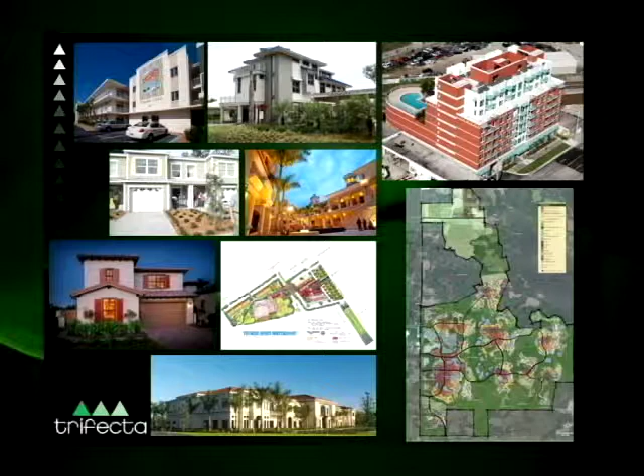These are just some examples of different projects. On the second row, left-hand side, those are Habitat homes in Dunedin, all the way up to a zero energy home you see in the top middle, out on Treasure Island. So there's everything from Habitat townhomes all the way up to, in the bottom right, a community called Babcock Ranch, which currently has approval for about a 75 megawatt PV array and is going in for approval of a 150 megawatt array, looking to create a sustainable town powered entirely by solar. It's currently a cattle ranch, providing meat and produce locally from the farm, with a completely different mindset as they develop this town. So you can see, high-rise buildings, low-rise buildings, mixed use, all of these can be green.

The way I set this up is, two years ago we really focused on what you can do as a homeowner. We will get there, but I wanted to give a larger perspective first and then narrow things down. Also, I didn't want to do the same thing I did two years ago—that's just my thing, I don't ever really do the same thing twice. I'm happy to give that information, and I know it's available on YouTube, so I really didn't want you to have a rerun, so to speak.

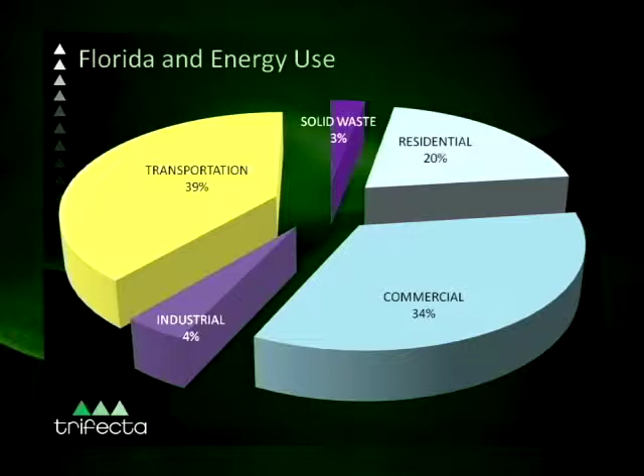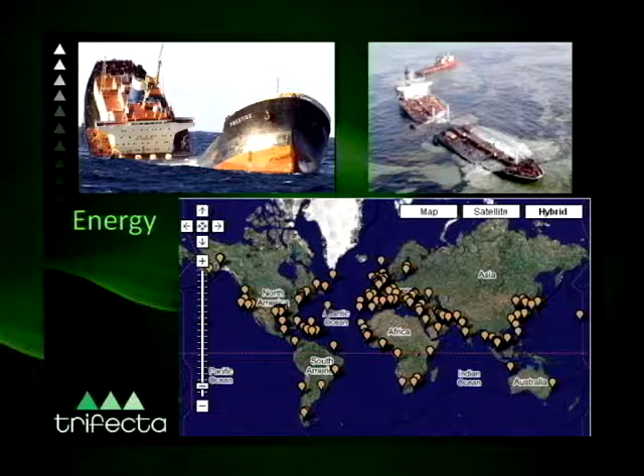Traditional fossil fuels have their issues. We get it from around the globe and it comes to us, and it doesn't always make it here. We've experienced this close to home and in the very recent past.

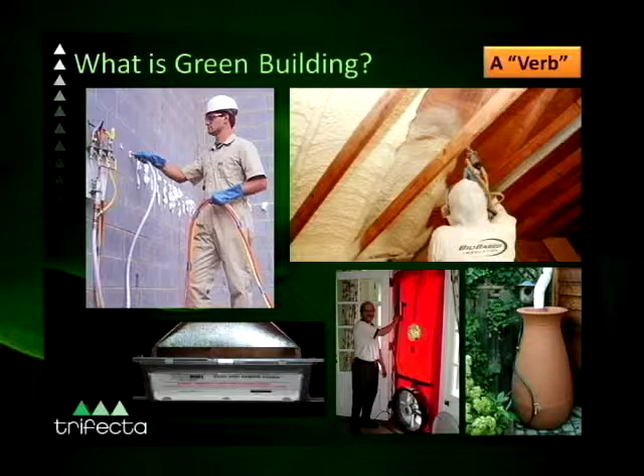We talk about green buildings from a perspective of both a noun and a verb. A green building is this house, this structure that is more environmentally friendly—that's the noun. But it's also a verb, from the standpoint of what did we do to make that house high performance, healthy, energy efficient, water efficient. What are the actions that we took? Whether we're going to add additional insulation, do some performance testing, protect the ducts, or harvest rainwater—those are all the actions we do to make the homes or buildings more healthy and efficient.

When I look at houses, we talk about this whole house approach, and I like to think of houses like a body. If you think about your body, you have your bones, your structure—that is the structure of your house, the walls, the things holding it all up and together. In your body, you have organs, and those organs basically move everything around. Just like in your house, you have mechanical systems—your air conditioning, your hot water heater. Those things are your organs for your house.

And then you have what I call the trim or the finish—the makeup, the hair, the clothes, it's on the outside. We all see it, that's what we call eye candy, so to speak. And we have that in a house as well—it's what we see, the walls, the floor. Ooh, I really love that glass tile. Ooh, it's recycled glass tile, that makes it even better. But it's $20 a square foot. Ooh, I don't like it that much.

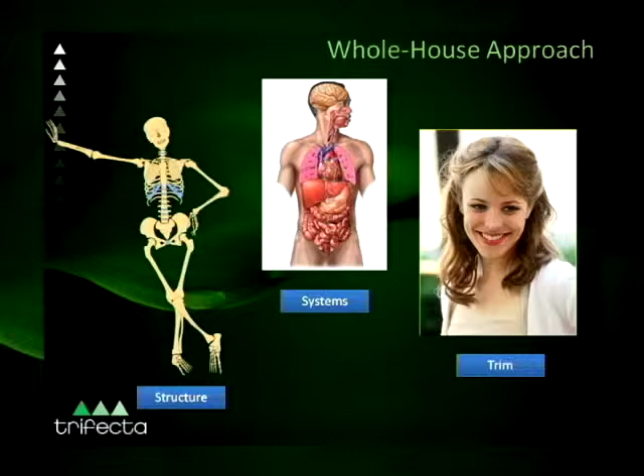Those three things have to all be functioning in your body. If you have a broken bone, you're not right. If you have a failed liver or a kidney that's not working, you're not right. And if your skin is falling off your body, someone will probably point out to you that you're not right. So those three things have to work together and be functioning properly for you to be a healthy person. The same thing goes for your house—if one of those systems is out of place or out of whack, your house is out of whack and it's not going to be healthy and efficient.

One of our biggest challenges with existing homes is the fact that we will go in and fiddle or tweak with one of these components without thinking about what it possibly could do to the rest of the system. And so that has historically been a challenge.

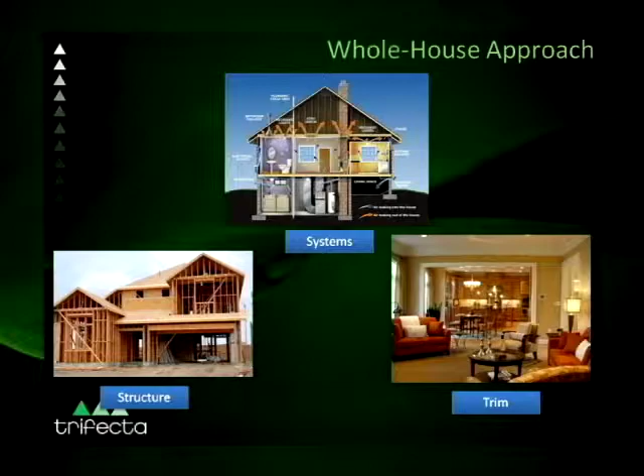When we hear about sick building syndrome, we have an older house that someone has decided we need to make leak free. They go and seal it up so tight without now introducing fresh air. Well, the fresh air used to come in through cracks and crevices—not necessarily a controlled way to do it, but a way to do it. Now that we've sealed that up, we're not getting enough air exchange in the house. So we have to take that into consideration if we're out there caulking and weather stripping—are we making this house too tight? Because it was originally getting air exchange through leaks. Not that leaks are good, but we have to definitely at least solve that problem so the system stays in balance.

And of course, this is the kind of stuff that I see when I go into attics. I will tell you quite honestly, this is my brother's attic. He said, Jen, I need you to look at my attic. And he is not a handy guy—I don't know that I would ask him to hang a picture in my house.

I'm like, Chris, if you want your insulation to work properly, it needs to be evenly distributed throughout your attic. There are some issues with this. So I'm trying to figure out, well, how—attic insulation doesn't just eject itself from its original home.

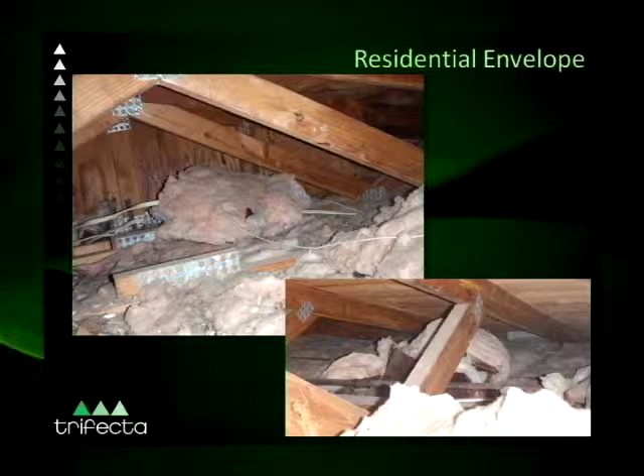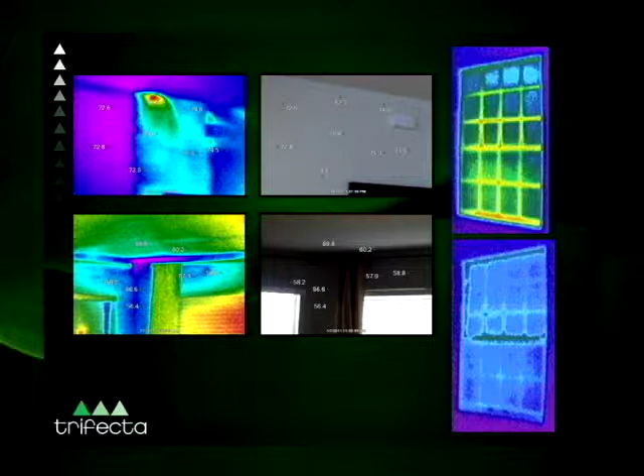You can see here leaks in the walls, leaks in the windows, or energy transfer, heat transfer. That's an issue with, quote unquote, the bones of the house. You can see here again infiltration coming in through the outlets, so an issue with the bones of the house, so to speak.

Here you can see leaks in air conditioning ducts. This I would consider an issue with the organs, or that part of the mechanical systems of the house.

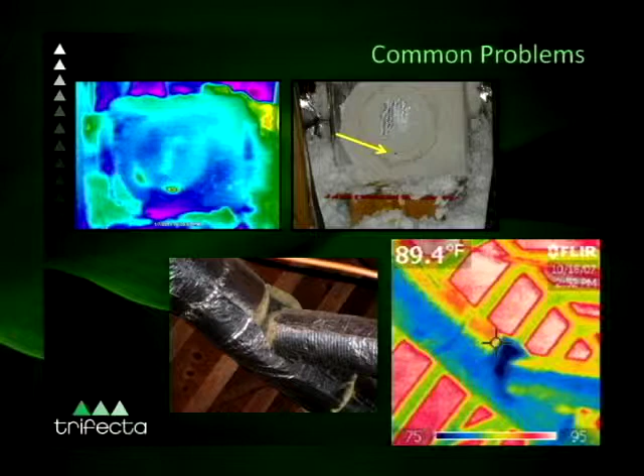And then this is what I would call the trim, so to speak, the pretty looking stuff. So this is why do people remodel? Well, they may remodel because there's a structural issue. They may remodel because there's a mechanical issue, or they may remodel just because they got tired of the tropical fish theme, or the very dated bathroom, or the issue with the mechanical system. So this would be what I would call the skin, or the trim, or the eye candy, or a lack of eye candy, so to speak.

And so this is why we kind of move into this. Why do we improve or try to improve upon our homes? I'll just very quickly go through these things. These are really the emerging trends in green and sustainability, and what's going on, and why today we're really going to focus in on energy and water.

So we look at energy, water, building labels. These are certifications and/or labeling associated with green buildings, corporate greening, eco districts, greenhouse gas, net zero, project funding, and durability and products. I just want you to be aware of where this industry is going from a standpoint of energy diversity and monitoring.

The fact that I mentioned fossil fuel, a lot of it's coming from the Middle East. From a national security standpoint, we're looking at making sure we have a diverse portfolio in energy. Whether that's plasma, solar, tidal, wind, algae, or biomass, any diversity in energy is a positive thing from a national security standpoint.

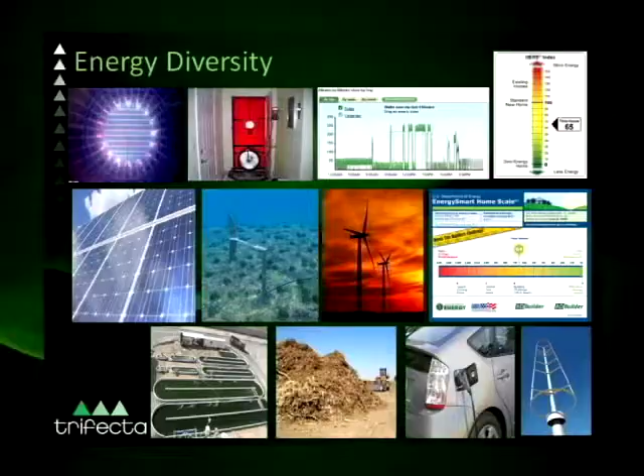Quick note about smart grid. Smart grid is this concept of decentralized energy production. Right now we have power plants, they produce power, they send power to all of us. Very convenient, very inexpensive. Compared to what most people around the globe pay for power, we have very inexpensive electricity. So smart grid is the idea that we can generate power locally, whether that's through solar on our homes, or through other means.

From a standpoint of someone might be producing power that they've generated out on an axle while driving, and then that gets fed back through a battery into their own home, which is called vehicle to grid. We've talked about electric vehicles and charging an electric vehicle, and then having that vehicle feed power back to the house during peak hours.

So that's something I'm working with quite a bit with Southern Company, which is a large power company in the country. From a standpoint of decentralized solutions, the reason I like this as well: number one, this is how we always used to do it. If I lived somewhere and I wanted water, I had a cistern or a well. If I lived somewhere and I wanted sewer, you had an outhouse or a septic tank. Not to say those are the most environmentally friendly, but the fact that I didn't have what we'll call transmission losses. We'll talk quite a bit about leaks today and how much we're wasting with leaks.

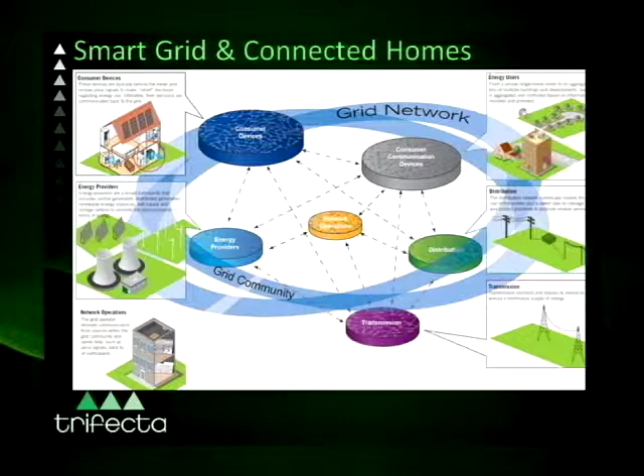The Model S Tesla, the sedan we get to play with, I can get about 300 miles of range out of it. So everyone who had that range anxiety of only going 20 or 40 miles and running out of power, that's not an issue with the newer vehicles. You can get larger batteries for extended life. The Chevy Volt, same thing—you can go 40 miles on electric, but it has a gas backup, so that doesn't become an issue.

What we found was by using an electric vehicle, I've saved $5,000 a year in gas. Now, I put a lot of miles on my car, so keep that in mind—I'm not your 10 or 12,000 mile a year person, I'm a 20,000 mile a year person. So my gas bill is significant.

$5,000 a year savings—now does that pay for a $200,000 vehicle? No, but those prices are coming down, so just keep that in mind. We figured out it cost about $1 to $1.50 a night to charge that vehicle, so $30 to $45 a month in fuel cost, versus my car which is $75 to fill, and I'm filling it sometimes 2, 3, 4 times a week depending on what I'm doing that week. So again, a significant savings.

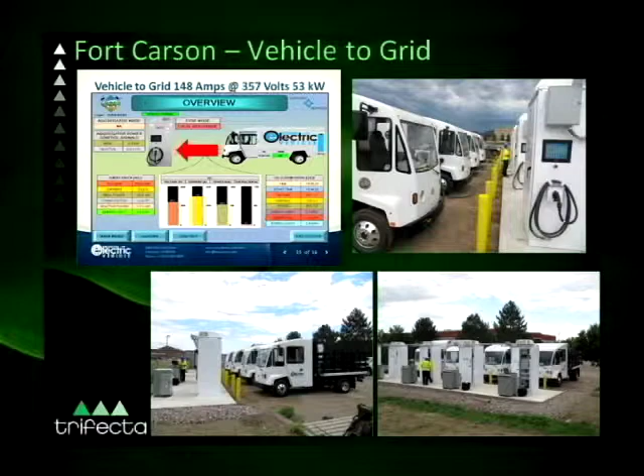This is Fort Carson in Colorado. This is actually the first live vehicle to grid system, and these vehicles are actually feeding back to the grid. You can see the amps and volts that they're creating. Those vehicles were out, they were charged, they did their thing, and now they've come back and they're feeding the extra power back into the grid. This is where we're going in the future—decentralized solutions, so to speak.

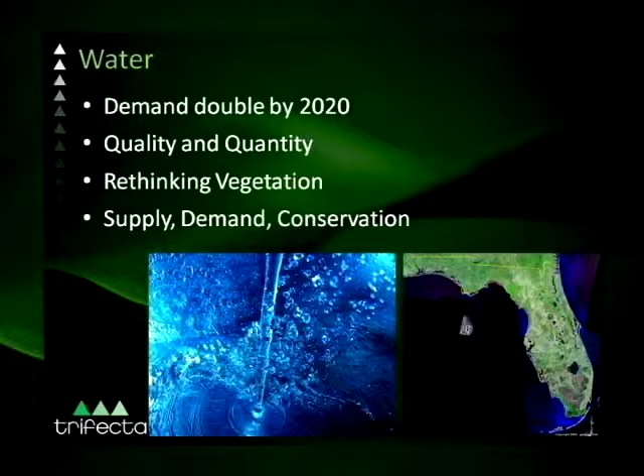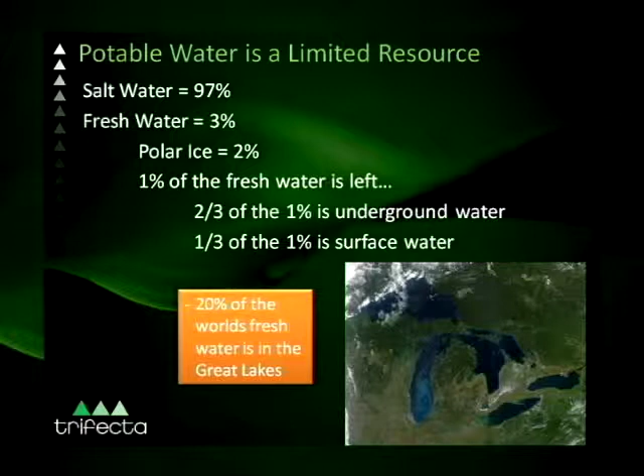Water—what are our issues with water? As I mentioned early on, I believe it's more critical than energy. You can live without power, you can't live without water. And you would assume, because we have a lot on the planet, that we have an infinite supply. Well, yes, we do, but it's costly to get. We know very little is actually easily available for us—1% or so is fresh, and the Great Lakes is where most of it is stocked in our world.

Looking at Florida, we get a lot of rainfall. Quite honestly, we get as much as we need from the sky every year, we just don't catch it. Nor would we want to catch it all, because it does need to go water our vegetation, recharge our aquifer, and feed our streams, but we do get quite a bit from the sky.

I mentioned hotels and how much water they use—we're looking at over 63 million gallons of water per day in that one industry in Florida hotels. That's based off of Tallahassee's count of hotel rooms available in the state and the quantity the hotels are reporting back that they're using daily. So keep in mind, when we're doing all these wonderful things to try and save water, we need to get out there and get the businesses saving this water as well.

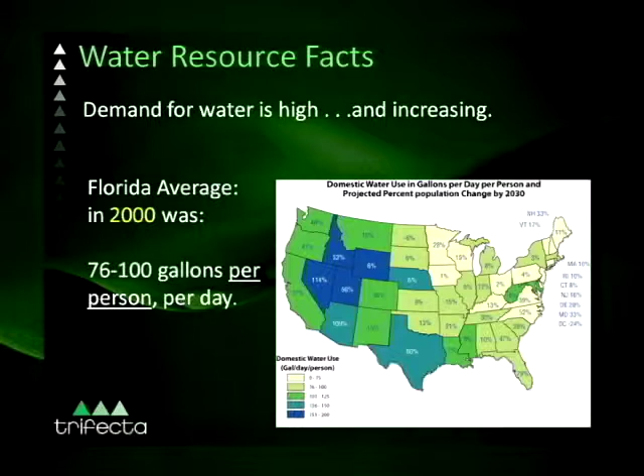So again, water resources, we know the numbers kind of vary between how many gallons per person per day, with 76 to 100 being some numbers. That number has gone up to 175. It just depends on whether or not you're including irrigation in that number. So a lot of times you see these numbers vary by almost 100 gallons per person per day, and that has to do with whether or not irrigation is included. But the bottom line is we're projecting a 79% increase in demand for water in Florida.

US average was 100, Florida average is 125, the high being 174. This does include irrigation. Water needed for just basic cooking, drinking, bathing, and sanitation, if you go bare bones minimum, is about 13 gallons per day—enough to drink, quite honestly. If you're camping, you know that.

Looking at eco-districts, what we're looking at here is creating either geographic or invisible boundaries where certain funding is available. So you may have been hearing rumors about PACE programs and funding where you can finance some upgrades on your house over on your tax bill. Those would be things that we would need these eco-districts for.

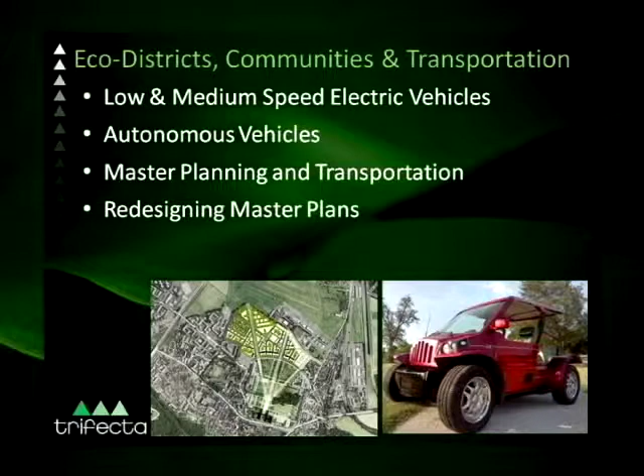And then looking again at low and medium speed vehicles, autonomous vehicles—how are we planning communities in the future? This is again renditions from Babcock Ranch, where you can see their build out is planning around these vehicles. You can see the town center before, but they are planning over the 30-year life of the community to build out the town center with autonomous vehicles. So they're working to say, okay, we can have these electric autonomous vehicles that move people around communities. As sci-fi as that may seem, this is where developers are thinking and planning future towns, so to speak.

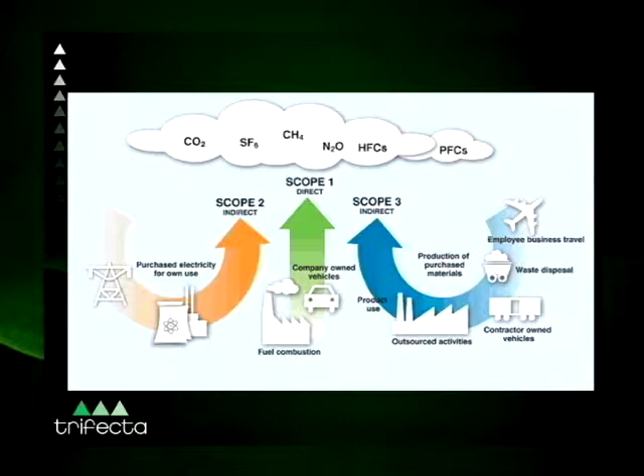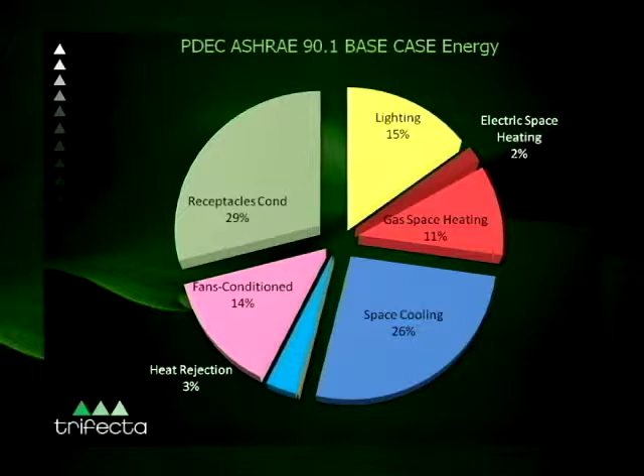We went through and threw everything, including the kitchen sink, at this building to make it as efficient as possible. Cost was not an issue in this analysis. We said, let's go up to R50 walls, let's go up to R100 insulation in the ceiling, let's go up to the most efficient equipment on the planet that I could buy. I don't care if it's $3 million for this air conditioner. It wasn't realistic financially, but we asked what could we do to try and make this building as efficient as possible.

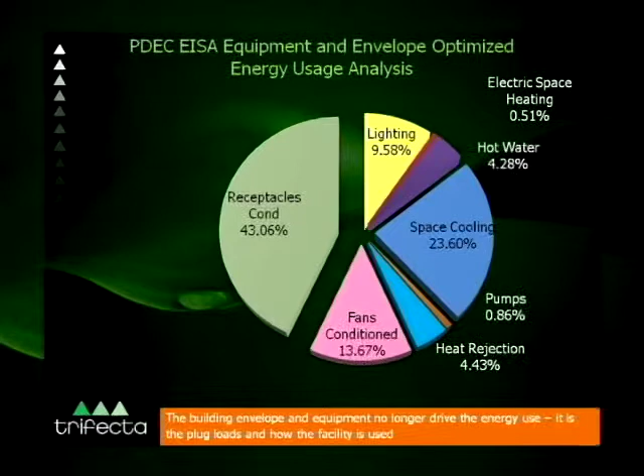And as you can imagine, you hit a wall. You have diminishing return—you can only make a building so efficient. Once we threw everything at this building, we found the best we could do was about a 43% energy reduction. And what happened was that piece of the pie, the green piece we call plug loads, began to dominate the performance of the building. So what that meant to us was, unless I take the people out of the building, I can't make the building more efficient.

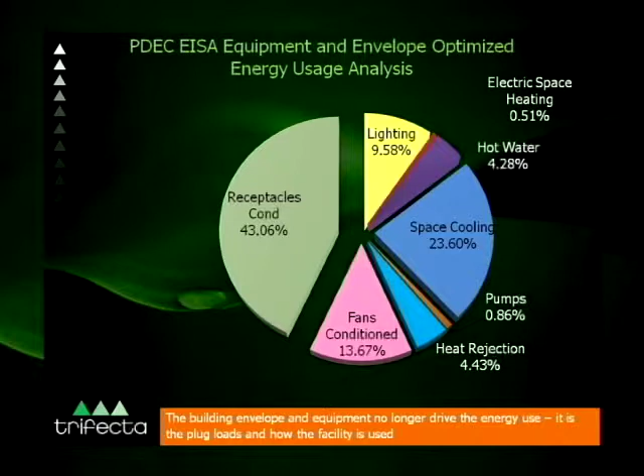This is as efficient as it gets because those people need computers to do their job. We would need televisions, microwaves, ovens, and water heaters for hot water. So unless I take the people out, I can only get so efficient with this building.

So when we talk about zero energy buildings, we talk about getting as efficient as we possibly can, but in order to make this go to zero, you have to have renewable energy. You have to have some sort of power generation that happens. So you can get as efficient as you want, but you're never going to get to zero.

The same goes for water. You will always have some water consumption. Now, where does that water come from is a different story. Does it need to come from municipal water supply, or does it all have to be potable? No, it doesn't. Right now, is that what most of us do? Yes. So just keep in mind that human element. Once we optimize efficiencies, we take over because we want iPads and iPhones and television and cable and hot showers and beautiful landscape, and we want that stuff.

So looking at federal funding, it's out there and out there quite a bit for green projects. That's good news that our tax dollars are going to support that. But we also want to focus in on durability and passive survivability, and improving durability of our structures against natural disasters is an important trend.

And then realistic green products. There was this trend for a long time about using bamboo and cork and glass tile, which was $20 a square foot, that no one could realistically afford. That has now kind of turned more into this pragmatic approach and sense, not just sexy. So, no, we're not going to do solar panels that end up covered in snow if there's not a correct way to get the snow off of those panels. So again, looking at a more practical approach to using some of these more environmentally friendly products.

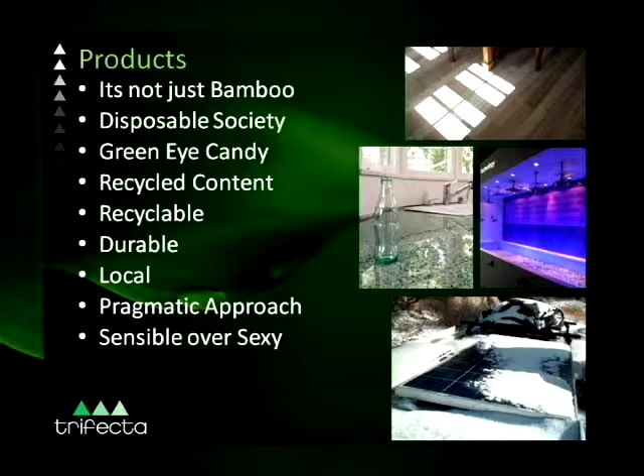And so popping now into this is my homeowner world, what can I do? And that is, know what a HERS score is. A HERS score is basically the mile per gallon of your house. We know we have a sticker, a mile per gallon. If I tell you I just bought a brand new car and I love it and it gets 8 miles per gallon, can you say that that's a good car or a bad car? Probably a bad car from a perspective of fuel efficiency.

We all know mile per gallon. We are comfortable with that terminology. A HERS index is your home energy rating, and in this scale, the lower the better. The lower you score, the better or more efficient your house is. Code right now, Florida Energy Code right now, is an 80 on this scale. So in order to build a house, you have to be an 80 or below.

But if you look at where code was in Florida over the past years, you can see in 2004, during the boom, the average efficiency of a house was landing around 111. Code right now is an 80. So almost a 30% energy difference between a boom-built house and what you have to do right now to pass code. Before 1979, there was no energy code in Florida, so that was the first time we actually had an energy code in Florida.

The house that I purchased and rehabbed was a 1972 house, and on this scale, it was a 275. It's now sitting at a 62, and I completed that renovation almost 10 years ago now. So just know that that scale can keep going up, and that's go back in time, go up on the scale. And so when we talk zero energy, we talk zero on this scale.

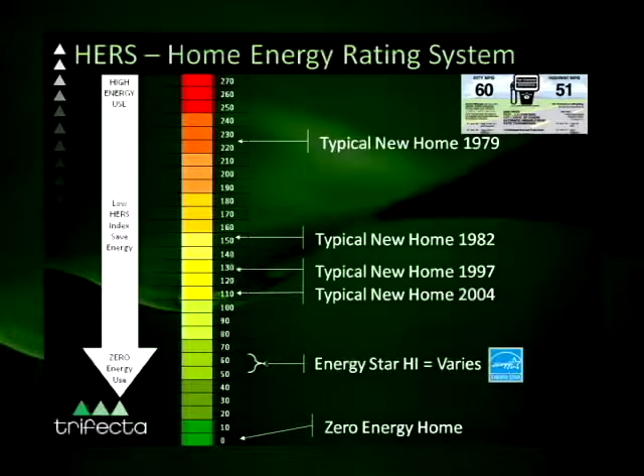Energy Star is kind of a value that's floating around, call it 60s, maybe low 70s. But again, code right now is 80. And most existing homes, if you know the age of your home, you can pinpoint it on the scale. You can get a rating by doing what's called a blower door test. There are Class 1 energy raters in the area that can come out and do a blower door test on your house. They build an energy model of your house in software, do performance testing to see how leaky the house is, add that data in, and then they can tell you what this number is.

There's an expense associated with doing that testing. But a lot of times when we do projects, we do before and after testing because we want verifiable results. If I'm going to add a better air conditioner or caulk or weather strip, I want to make sure that I actually solved the problem. So doing testing helps us do that.

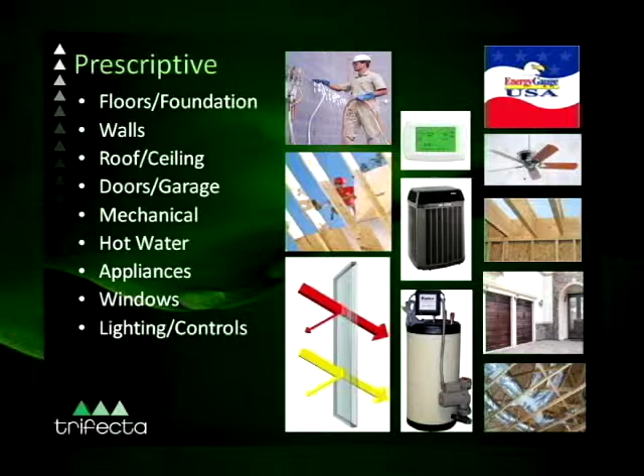So looking at what goes into this rating, all of these components go into that rating. We're looking at walls, floor, roof, insulation, windows—all of that goes into that rating.

The resources that we want to make available to you: there is a green home retrofit guideline. It's not a certification standard, it's not a checklist. You can use this to help you, number one, assess your home, and number two, it gives you a list of things you need to look at. It breaks down into energy, water, health, materials, and disaster mitigation, so you can assess your own home with respect to these components.

Now, what the energy assessment looks like—you may or may not be comfortable with your energy bill, but if you have your electric bills and can look at how much you've spent, there's an Excel tool, a spreadsheet. If you're not comfortable with computers, these print out in forms and you can do them by hand with a calculator. You put down your electric bill and it will tell you how close you are to the average Florida house, which would be compared to a new construction house.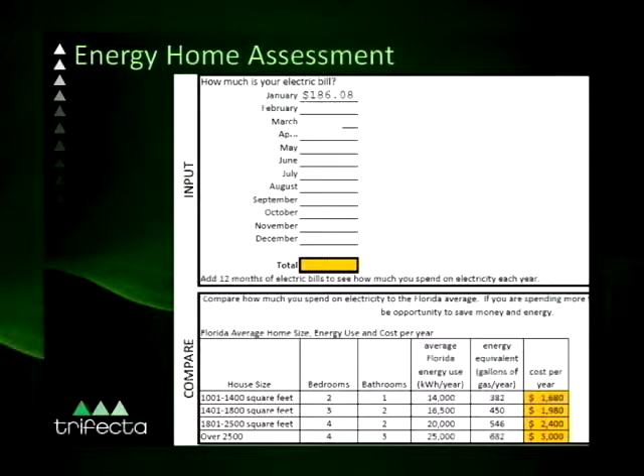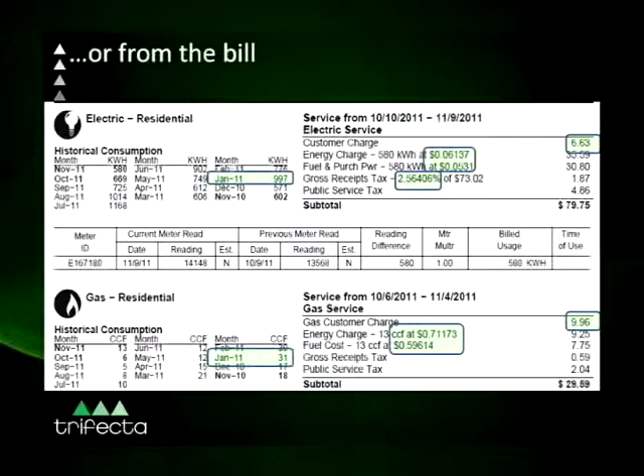If I add in all my electric bills and compare myself based on square footage, bedrooms and bathrooms, it at least tells you how efficient or inefficient your home is. This is from a research study we did for the City of Tallahassee—this is all public information, so that's why these bills are up here. We were able to pull the kilowatt hours this person was using each month, look at their rates and fees, and then add it all up using the assessment tool to get their monthly electric bill.

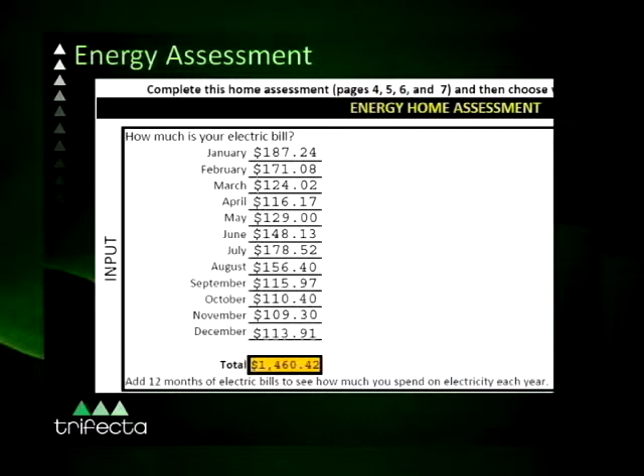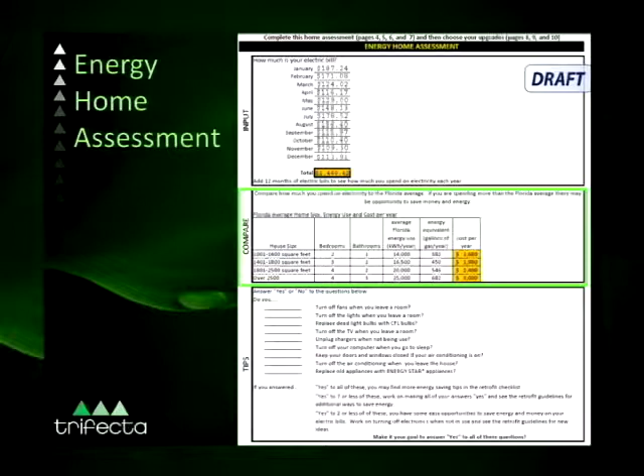This person was spending $1,460 a year in electricity. I think it's about average, but I know because it's a green home that it actually is better than average. This was a 3-bedroom, 2-bathroom house, so I wanted to compare my $1,400 to the Florida average shown here. When I compared it to the Florida average, I saw that the average was $1,900, so they were actually spending $500 less a year than the average house in Florida of that size.

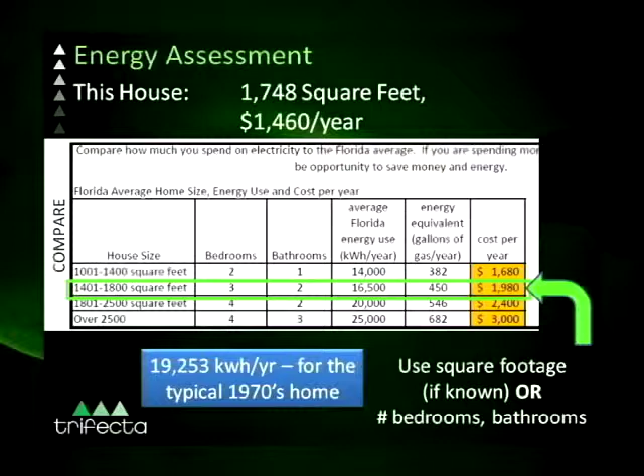Now, why were they spending less? Because this was a certified green home. This builder had gone through and made the house healthy and efficient, and we were analyzing the results of that program. You could go through and put in your monthly bills and compare yourself here—a relative feel of how you're doing. Am I doing better than average or worse than average? Because if you're doing better than average, don't get all freaked out about buying new widgets to make your house super efficient, because you may already be at the point of diminishing return.

Now, what it gives you—and the reason I'm not going to go into each one of these as a 'here, go do this to your house'—I know this is difficult to read and boring to look at because I'm more of a picture person, but this goes through a list of all the things you can and should do: low cost, low-hanging fruit, do-it-yourself stuff, handyman inexpensive things, not paying thousands of dollars to hire a contractor.

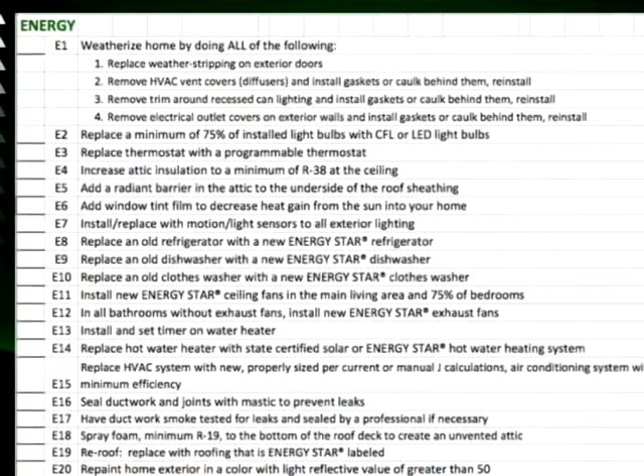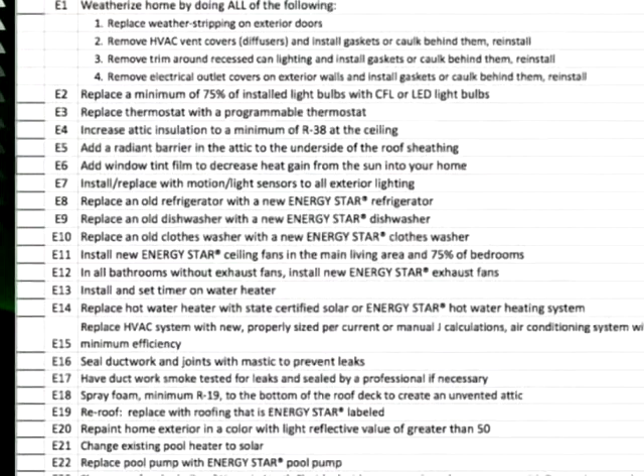Do-it-yourself stuff - these are the things we want you to attack first. It starts from simple to more comprehensive as you go further down, so you don't necessarily have to start with spray foam to a minimum of R19, which is down at E18. Let's start up top with weather stripping your exterior doors.

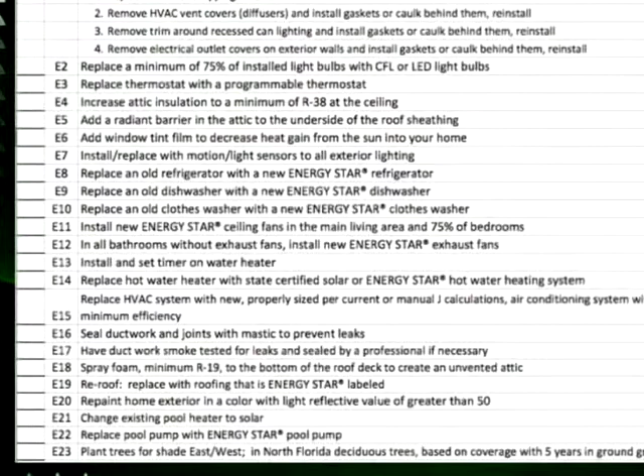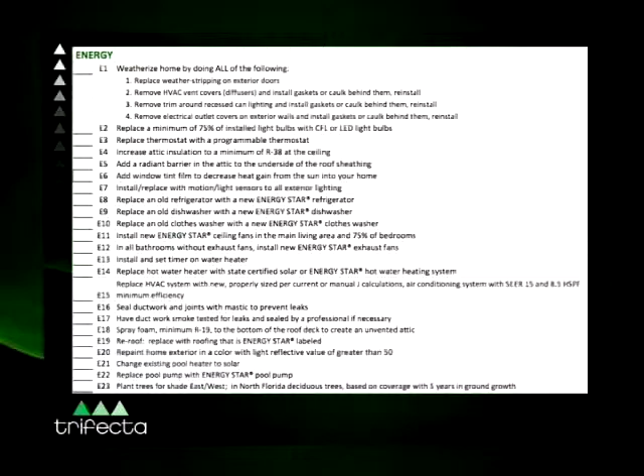This is a great resource to go to. Two years ago I gave pictures and presented each one of these items, so I didn't want to repeat that this year. Instead, I made this resource available to you, showing the list and how to assess your home. Some people don't like to read, but there are pictures and an entire reference guide available - it's not just a list. If you want to know more, the reference guide explains how and why you should do these things and gives appropriate references.

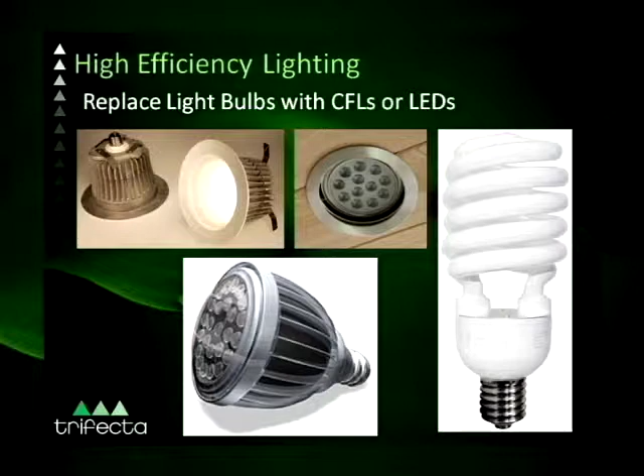I left this one example in because it seemed to really ring true with a lot of folks, and it was specific to lighting in my house. I didn't realize I was a lighting freak until I did this analysis - I have 61 light bulbs in my house. I had no idea until I started putting X's on here, and I realized I have 3 light bulbs in every fixture. Apparently I have an issue with the number 3. I just like 3, apparently.

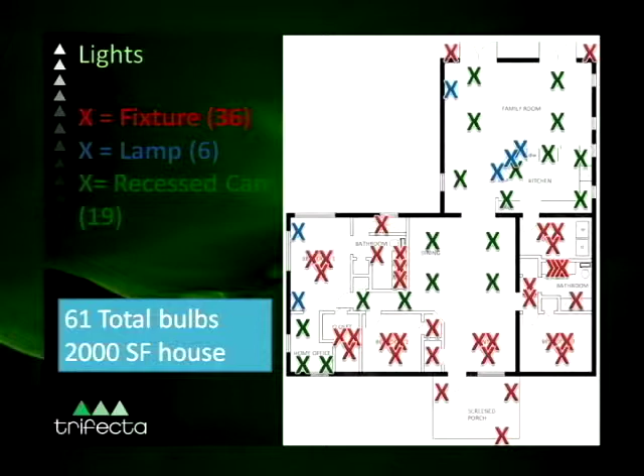So I went through this analysis - 61 light bulbs. Keep in mind, when we talk about lights being more efficient, we usually talk about the watts, the energy they use. But there's also a heat component, and most analysis doesn't take that into consideration. An incandescent bulb heats up, and heating things up in our houses in Florida is bad because we have to combat that with air conditioning. Your LED bulbs and compact fluorescent bulbs don't have that heat component.

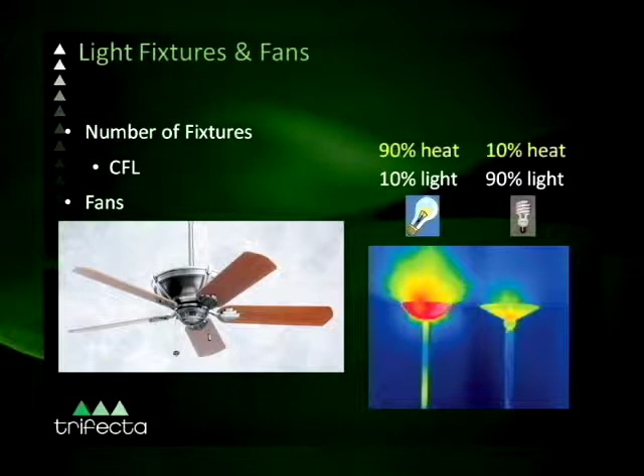We actually did this study for the DOE, Department of Energy, and they said to make the assumption that each bulb is on 3 hours a day. If you know your lights aren't on that much, modify these numbers, or if your kids leave the bulbs on all day while at school, modify accordingly. But this is based off of 3 hours per day, with electricity costing 10 cents a kilowatt hour at the time of the study.

In my house, I was using 3,660 total watts associated just with light bulbs. This was daily, which relates to 10.98 kilowatt hours, or 4,000 kilowatt hours per year. So it's costing me $400 a year to have lights in my house - this is for all 61 bulbs.

If I were to change all of those bulbs over to compact fluorescents, it would reduce my total watts to 915, reduce my kilowatt hours per day to 2.7, reduce my kilowatt hours per year from 4,000 to 1,000, and now I'm only paying $100 a year to light my house. If I wanted to go to LEDs, even more efficient - fewer watts, fewer kilowatt hours per year - only $20 per year to light my house.

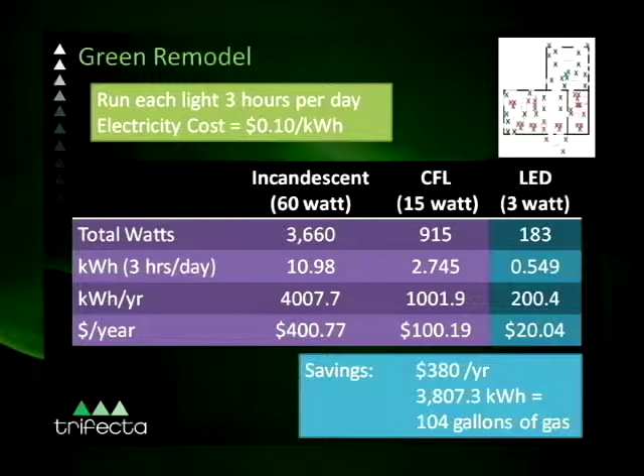So how much would it cost me to retrofit my house? Looking at the cost: incandescent bulbs are 50 cents, compact fluorescent bulbs you can get a 12-pack for $10 at Home Depot or Lowe's, so about $1 a bulb, or a $61 investment. That $61 investment was going to save me about $300.

Again, my first year savings, because my investment was so low, is significant between my electric savings. About $297, and then over a 10-year period, about $2,900 in savings. That's assuming I had to buy those light bulbs again because they weren't going to last 10 years.

So I had to buy them again at 5 years. Looking at the LEDs, if I went and purchased those bulbs again, the best we could find in bulk was a bulk purchase for $6. Now I've seen them at $45. If you buy in bulk you can get decent prices, but that still meant a significant investment, a $366 investment. So it looked like after my first year of savings, I only had a $14 savings, and it wasn't because I wasn't saving energy, it was just because I had to spend so much money buying the light bulbs.

So over a 10-year period, $3,400 savings. A bit more savings, but the bottom line was compact fluorescents are pretty good. They give you a really quick return on that investment, so you don't have to invest that much money to get a significant return.

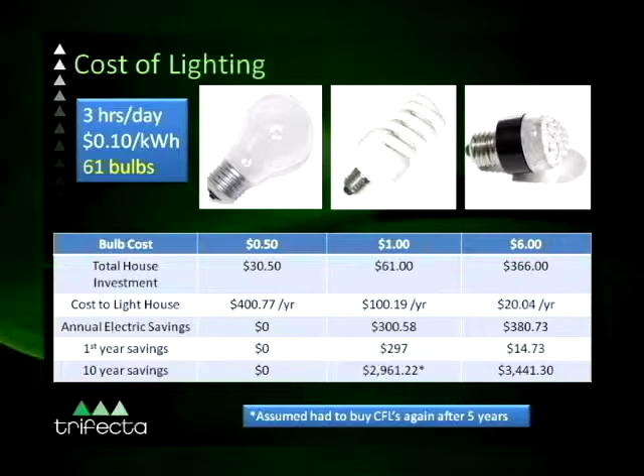That's an example of conservation versus generation. If I were to change the bulbs out to compact fluorescents, I was saving basically 1,000 kilowatt hours. If I wanted to produce that same amount of power, I would need a 0.62 kilowatt system, a 620 watt system of PVs. Your installation costs will vary depending on who, what, where, when, why you get PV quotes from, but this system was going to cost me $2,700.

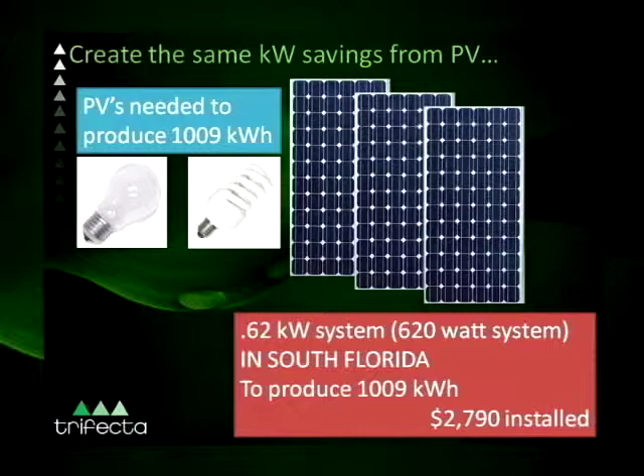So I could either go buy $60 of compact fluorescent light bulbs and save 1,000 kilowatt hours, or go buy a PV system and generate the same amount of power for $2,700. So conserve first, spend your $60 first, because you're saving as much as you need to generate here. If I wanted to generate the same amount for LEDs, I'd need a much larger system, about a $10,000 investment. So conservation by far is less expensive than generation, so you need to conserve first.

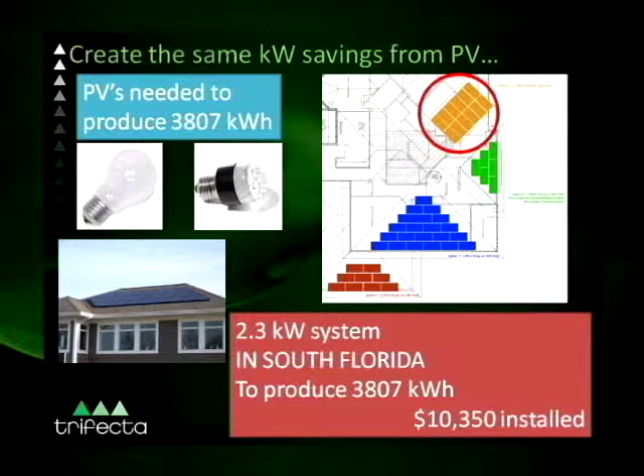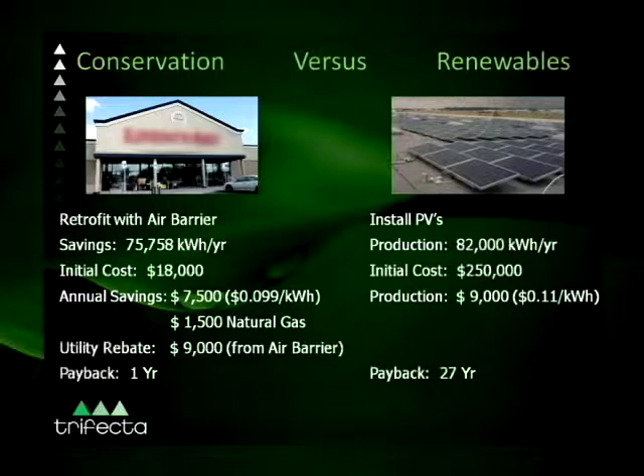Some resources I wanted you to know about: there is a web page for the National Renewable Energy Lab, and there is a program called IMBY. What it lets you do is take a map and place a photovoltaic system anywhere in the country, and it will tell you the payback.

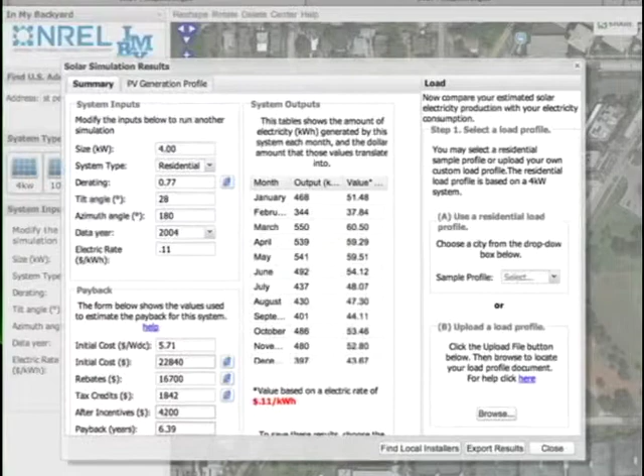This program is only going to be running for a few more months, because right now it's tied to, if you see in the bottom left, the rebates, the tax credits, and the incentives. So it pulls all of the data available from your local utilities wherever you pinpoint that PV system. I went through and dropped one in Duke territory, one in FPL territory, and you can see the incentives and rebates change based on what the utilities are offering.

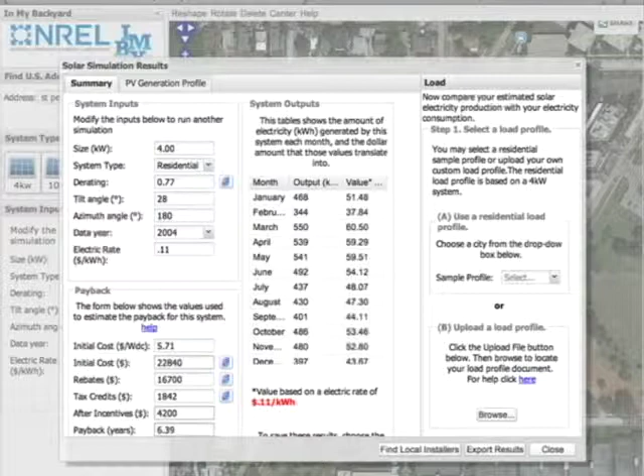You can see here, this was a 4 kilowatt system that showed me a 6.39 year return. This was a 10 kilowatt system in the same area. I dropped these all in St. Pete, right by Vinoy Park. This gave me a 17-year return.

And then I took this same 10 kilowatt system and dropped it up in Connecticut, and you could see it was a 20-year return. So it is adjusting for the different power companies. Again, it's a great resource.

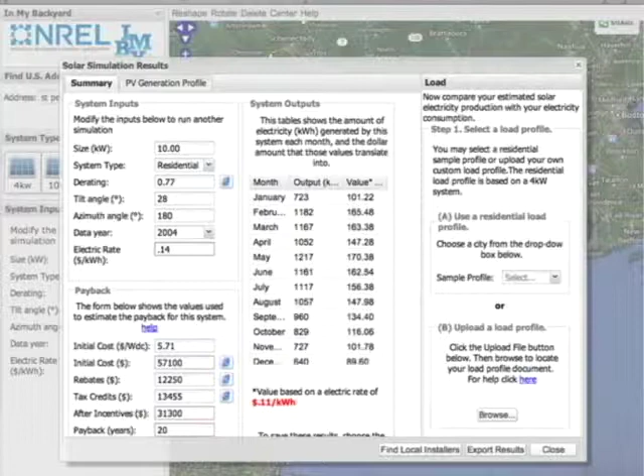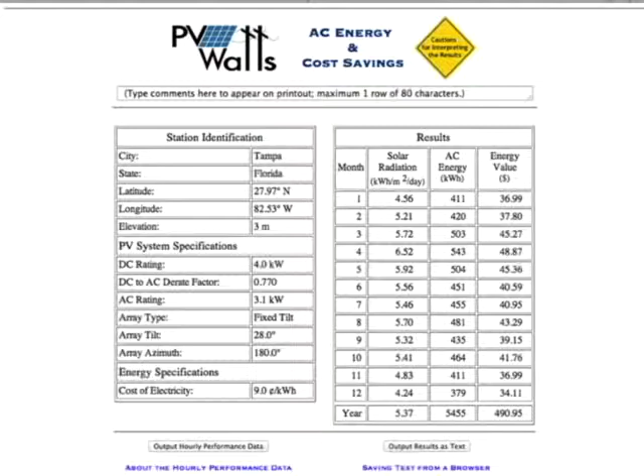Another resource you should know about is PV Watts. What this does is it tells you how much power you're going to produce from your system, based off of where you are in the country. Those two resources are great for you, and I just modified those a little bit. This is the type of stuff that's all on the program we showed you, that will make that information available to you.

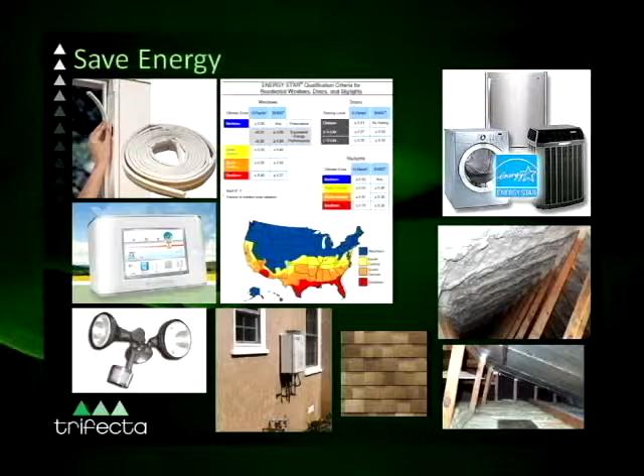And these are the things that we want you doing to your home. Whether it's weather stripping or programmable thermostats or insulation, all of those are low-cost things for you to do. Water, yes, we talked about how it's an issue and we need to save it.

This would be something my husband would do because he's an engineer. So if I complained about hot water, this is what I would wake up to, no doubt in my mind.

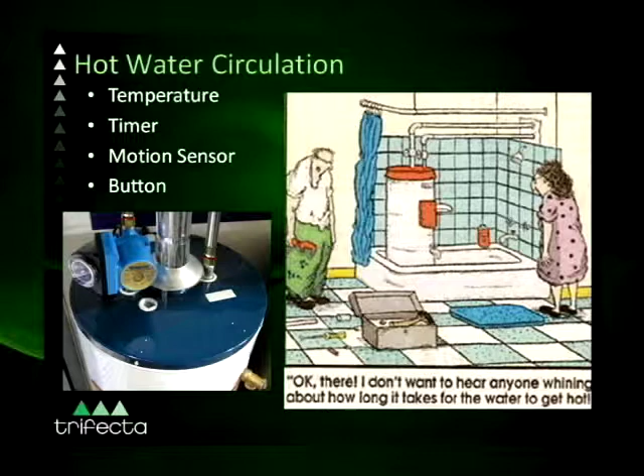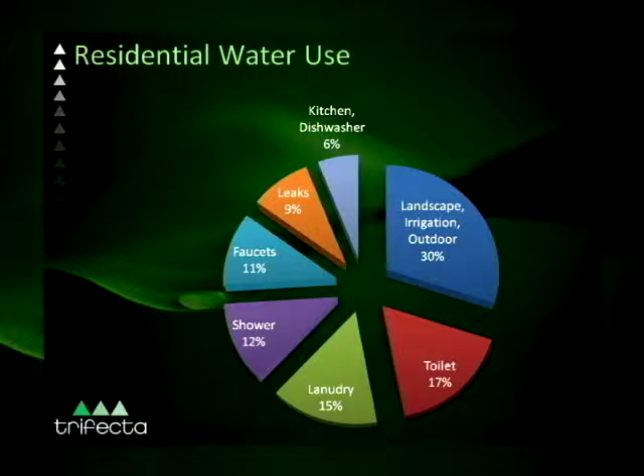So this is a national number. This pie chart is national, where we can see we have outdoor irrigation and water use inside the home. I'll give you the Florida number. If you see how much we use outside, compared to the national average of about 30%, we use a lot more water outside.

So our big savings here, and I know I don't want to say bread and butter, because it's not that you make money off of educating homeowners about native and Florida-friendly vegetation, but that is one of the main things your extension agents do. They are genius when it comes to water efficient landscapes.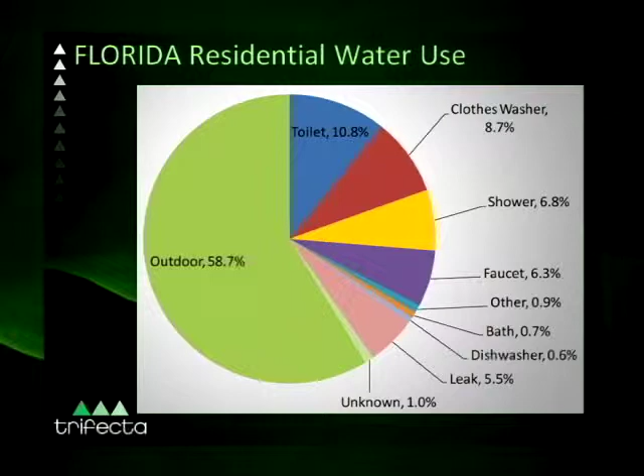This is where we need to look. If you start looking at leaks in your house, a leak can very easily account for 10,000 gallons of water wasted. We can save 5 to 10% of our water bill, because we're looking at basically 10% of our water that could be wasted through leaks. One trillion gallons annually wasted in the US from leaks. Trillion gallons. So you think about the Southwest and the water wars, and you think about one trillion gallons of water, there's a significant opportunity, but a lot of this has to do with our aging infrastructure and those leaks we mentioned.

Yes, sir? Is that just potable water? This is potable water, yes, sir.

So again, a toilet. There is a toilet in my house right now that every once in a while I hear this psh, psh, and trust me, it's driving me nuts because I've asked my husband to fix it, and he knows that if I have to fix it, it's going to become an issue. The flapper is loose, the flapper is getting old, so it's leaking a little bit. The bottom line is usually our toilets have a flapper that gets a little bit old and it's leaking, and we're looking at 100 to 200 gallons of water a day from a leaky flapper.

Shower heads, 10 drips per minute could be 500 gallons a year. A faucet dripping once per second, drip, 1,000, drip, 2,000, drip, and that's not a super fast pace, 3,000 gallons of water per year. So those leaks that you know about that you can fix can have significant 5 to 10% savings.

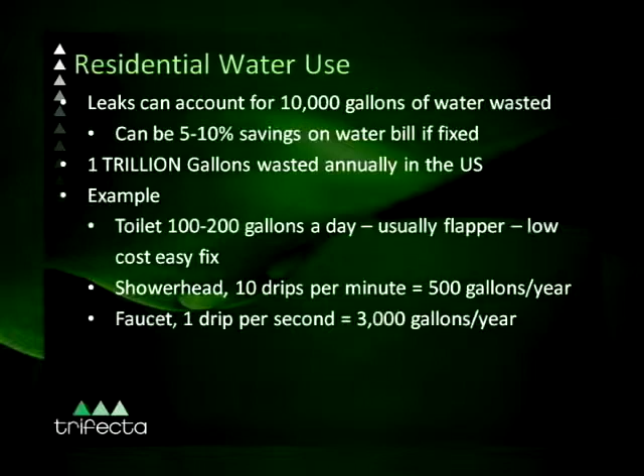The leaks that you don't know about, unfortunately, the main infrastructure leaks that are getting to your home, not necessarily a problem that we can solve. Again, it goes back to that aging infrastructure.

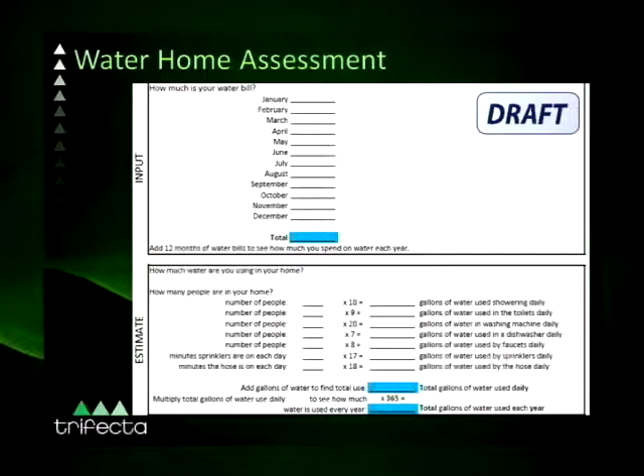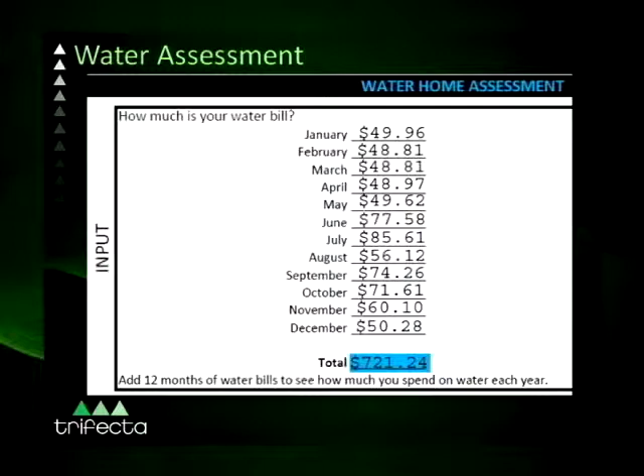The tools that we're going to make available to you also have a water assessment. They go through and, if you have a water bill that tells you how many gallons you're using, you can use that. If you're not comfortable reading your water bill, or if you're on a well, you can use a calculator at the bottom that asks how many people are in your home, and it has some averages we've been using to calculate water usage. In the instance of a water bill, you can fill out your bill and we know your water rates and can calculate how much water you're using on average. Then it also gives you a list of things you can use.

So, native drought tolerant vegetation—again, your extension agents are your best resource for this stuff.

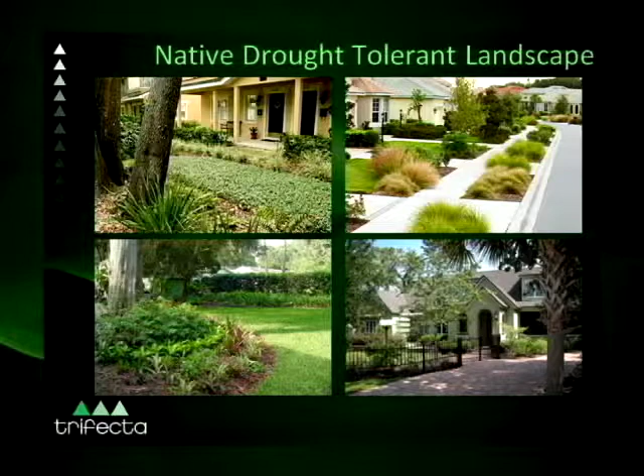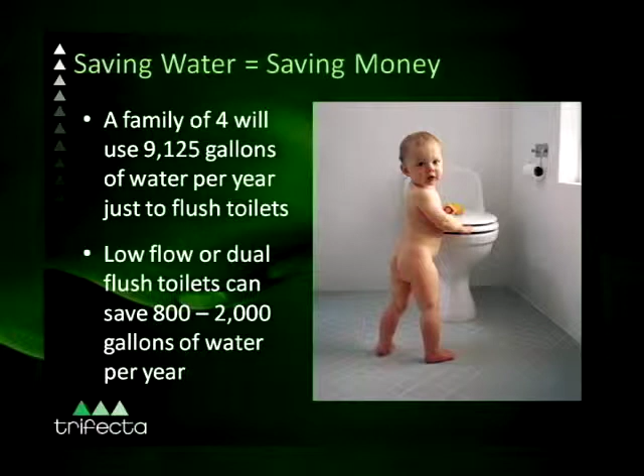We know a family of four uses about 9,000 gallons of water a year to flush toilets. Dual flush toilets and low flow toilets can save 800 to 2,000 gallons of water per toilet per year, and they look just like every other toilet at this point in time.

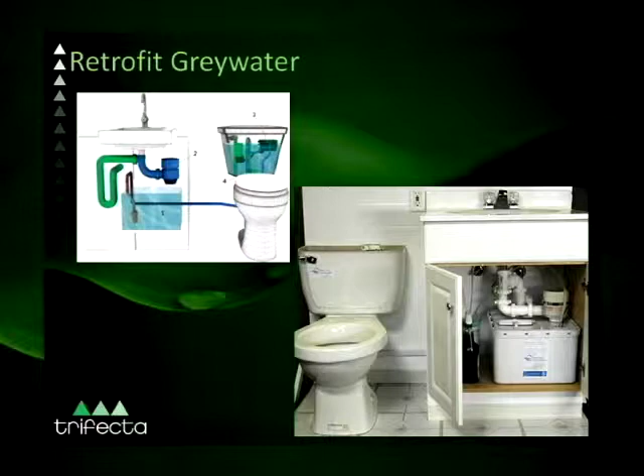There are gray water systems now that you can use to collect water from your sink and use it for your toilet. These are systems we're starting to see become more popular, and these are systems we've seen take off.

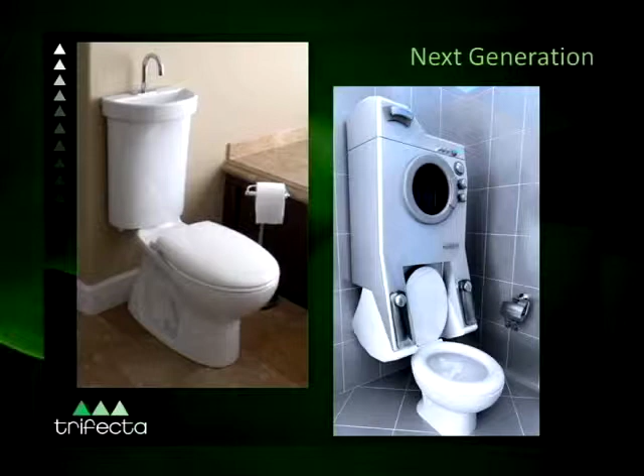Caroma made this toilet—it was a very short-lived toilet on the left, I guess, because if you're a man and you're already standing in that position, it's convenient, but for us women, not so convenient. And then there's the European idea of washing your clothes and using the wastewater to flush your toilets. These did not take off, but there are beautiful ways to collect water and reuse it.

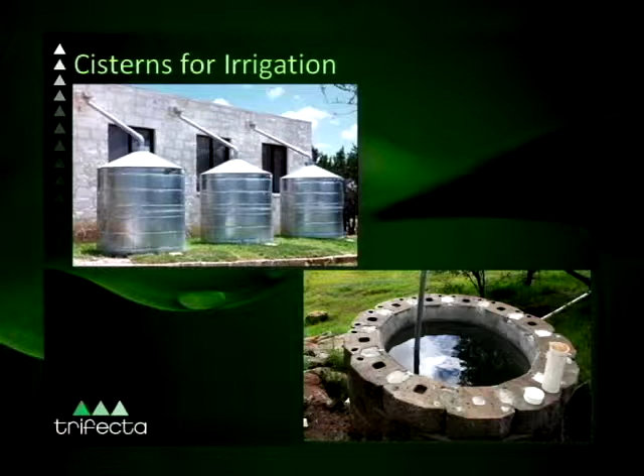These are my cisterns—we're going to wrap up and take questions at the panel. So, cisterns can be a baby death trap, but the bottom line is you don't have to create hazards when you are collecting rainwater as well.

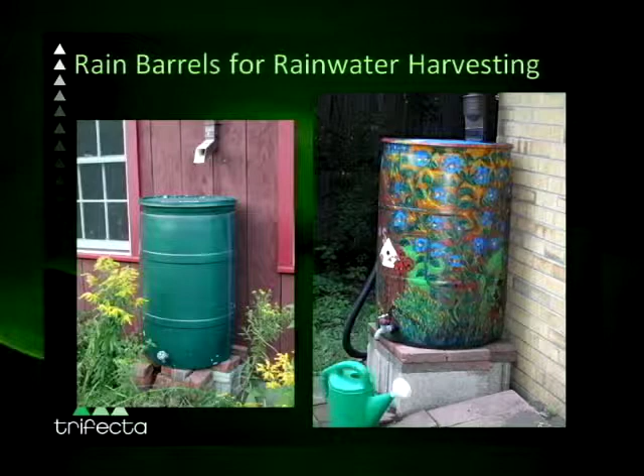These are cisterns in a 1902 old DuPont family house that were put back into service when we did a remodel. With rainwater collection, you can get creative or you can be as discreet as you would like, and you can collect as much as you would like as well.

And then this house is the house of Dr. Anna Marie with the Weather Channel, and you can see all of the simple rain barrels that she has collecting on her house.

I'll just mention that this assessment also has the other categories I mentioned. There is a health assessment which will help you look at healthy things in your house—filters, how you're taking care with cleaning products, different things in your garage that might be contaminating inside your house—and it provides you with suggestions as well.

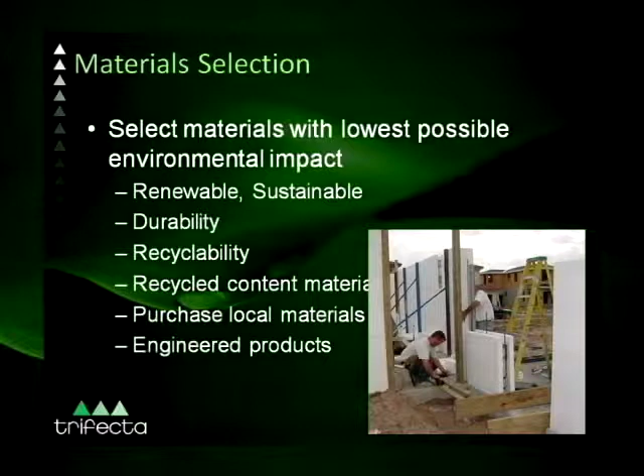Selecting materials, we'd like you to select durable materials. As beautiful as some things are, if it's not going to last, you're ending up throwing it out and replacing it—that's not a good environmentally friendly thing to do. There's also a durability assessment.

And then the one resource I believe I've noted here was to make sure of hurricane preparedness. This is something that we all need to do. So from a durability standpoint, a safety standpoint, make sure that you are prepared for hurricanes.

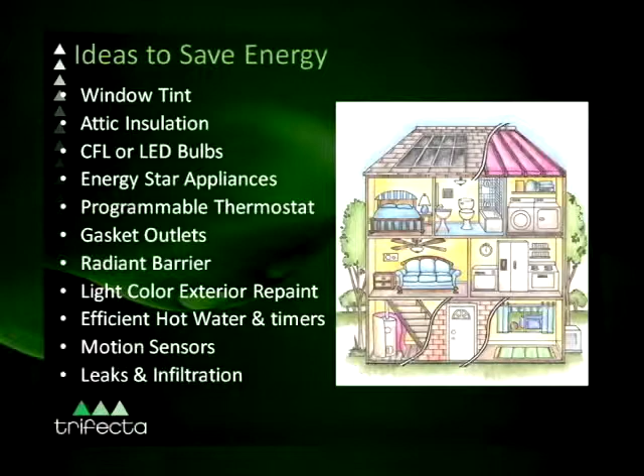These will be, again, available on the PowerPoint—just quick ideas to save energy, as well as the resources that will have links to, and quick ideas to save water. So that's just kind of where we end.

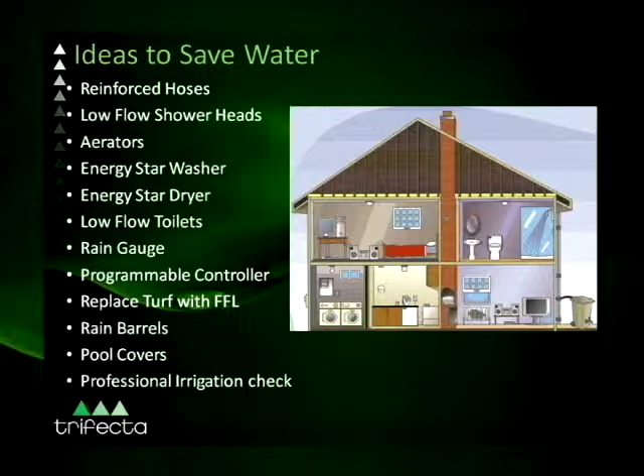If you have questions, we will have two hours of panel discussion, so by all means—we're not running anywhere. We're here, ask us questions, because it's easier for us to direct you specific to your house than to try and cover everything up in these quick presentations.